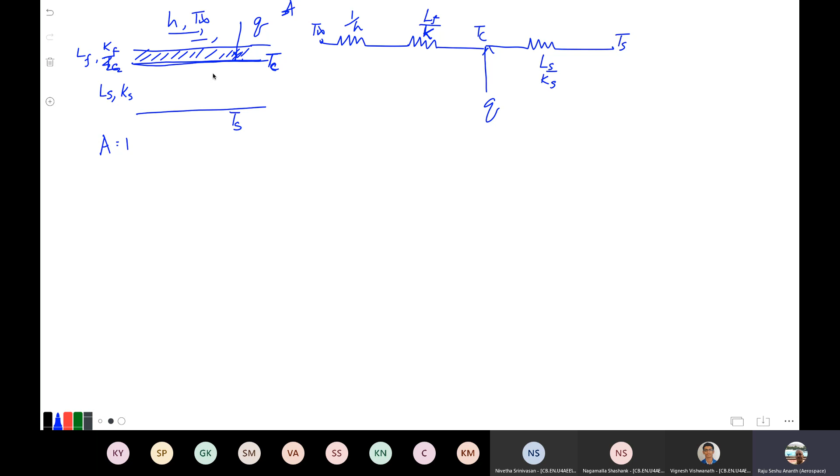However, this is only when this substrate is transparent. Suppose it's not, it's an opaque material, so I'm heating it here. TC is there, but I'm not heating here. So this is TF. I don't know the TF.

So there is a Q coming in. The Q1 escaping to the air and Q2 escaping to the outside. I don't know TF, so how will I solve? That's the difference between this problem and the earlier one.

The only thing is, I know Q2 is going here as well as going here. So this is TC, this is not changed, so I can get Q2 from knowing TC. What is Q2? TC minus TS divided by LS over KS, which is same as this. So Q2 also is same as TF minus TC divided by LF over KF.

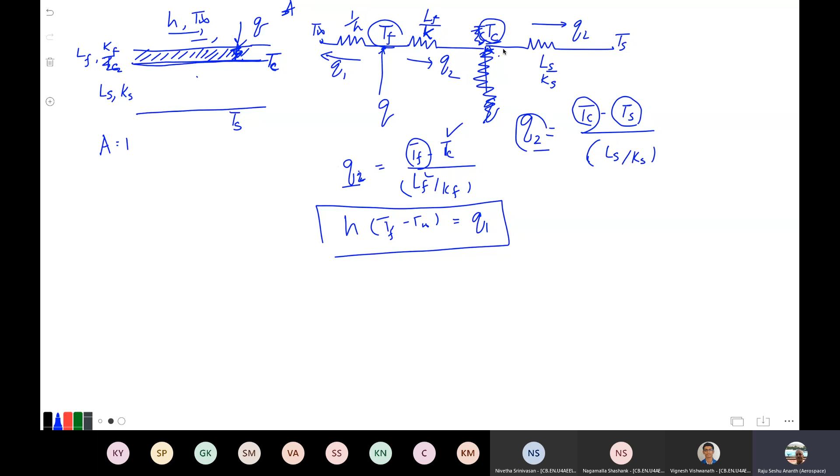So just a small variation becomes a little complicated because you don't know this. The advantage of doing this electrical resistance analogy is that many times you don't have to know the middle temperature, you can get the total resistance. But unfortunately, I don't know this, so I cannot do that way. You've got to do it in a separate way. Many people couldn't get this one at all.

Anyway, I'm just explaining. Are there any questions on this? There's just a small variation that makes some difference here. You've got to use the fundamental principles to solve it. But the electrical circuit does help you, it tells you exactly how Q2 is going, there's no heat here, so Q2 is going here. Understood this problem? Any questions? Please feel free to ask if you didn't understand any concept here. Okay, all right.

Now, the other question I was asking about is a hollow sphere. I asked two different problems. So inside radius is Ri and outside radius is R0, with T0 and Ti here. The first problem was, what is the temperature distribution in this space?

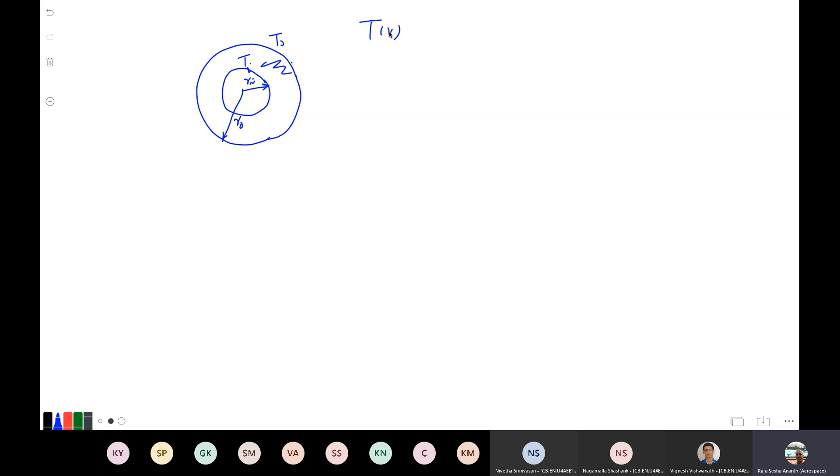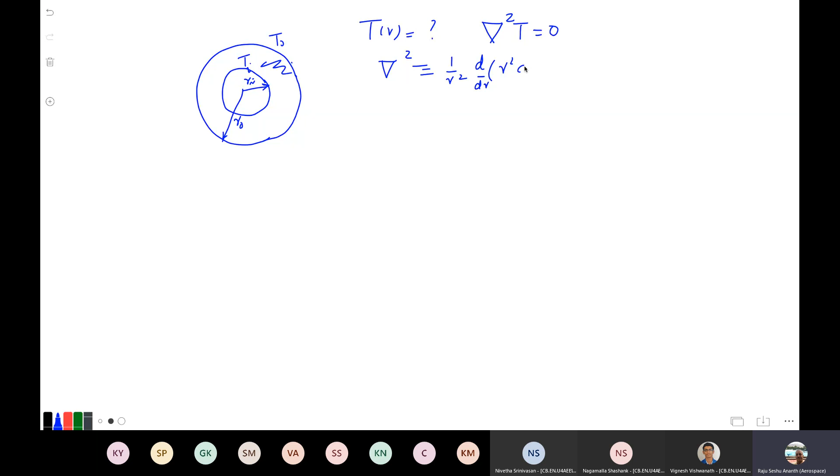If the temperature distribution question is asked, immediately I know the conduction in steady state is del square T equals 0. In spherical coordinate system, the del square operator is 1 over R square, d/dr of R square dT/dr. So I need to solve this equal to 0. Then R square dT/dr is a constant.

Then you can differentiate both sides, which goes to 0. So dT/dr is C over R square. Integrating again, T of R is minus C over R plus D, some other constant. So knowing the ID and OD, I can calculate C and D. But that doesn't, if I ask you, this is how to solve the temperature distribution.

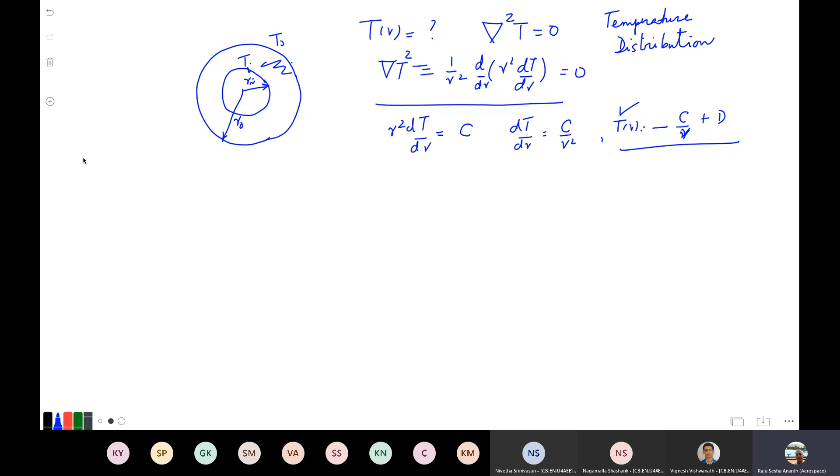However, suppose I want you to know what is the thermal resistance of the hollow sphere. How will I do that? Now, it's advantageous if I give a thermal resistance, either it could be a sphere or a hollow cylinder, it doesn't matter. Let's say I have a hollow sphere and I have a hole here. So this is Ri, the radius, and I take an arbitrary radius R and I formulate the heat.

Remember, in steady state heat transfer, the integrated heat escaping this whole sphere at any radius is the same. That's key, that is the important thing. So minus K, look at Newton's law: minus K, area 4 pi r squared, dt/dr, is Q. Remember, when I talk thermal resistance, I need Q divided by delta T, or delta T divided by Q, whichever way, to get the resistance.

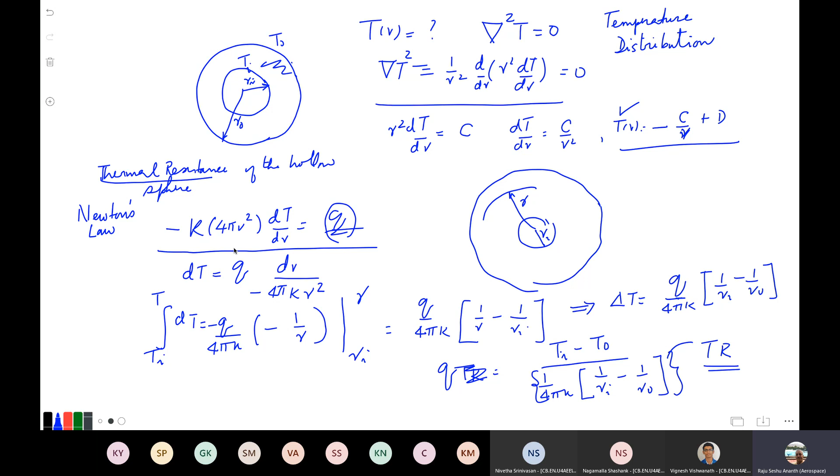Okay, so whenever thermal resistance is asked, it's advantageous to use this equation because it gives you directly T and Q. That's the reason. Okay, how will I do that for a cylinder? Let's just do that also. Okay, so I have a cylinder.

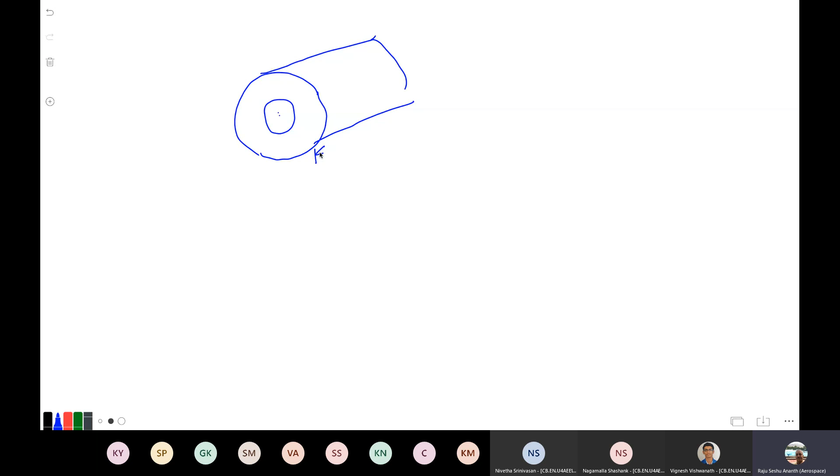If it is a full cylinder, what happens to the temperature distribution? Anybody knows? It has to be constant because the logarithmic thing goes to infinity here. So that constant is, so it has to be in a sphere as well as in a cylinder. If it is not hollow, it has to be constant, uniform temperature, the whole thing. So let's assume this is a length L. Remember, I'm trying to get the thermal resistance on a cylinder.

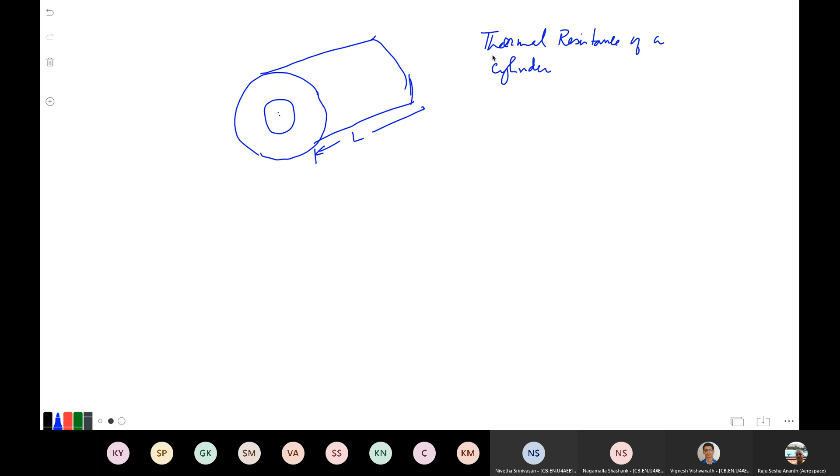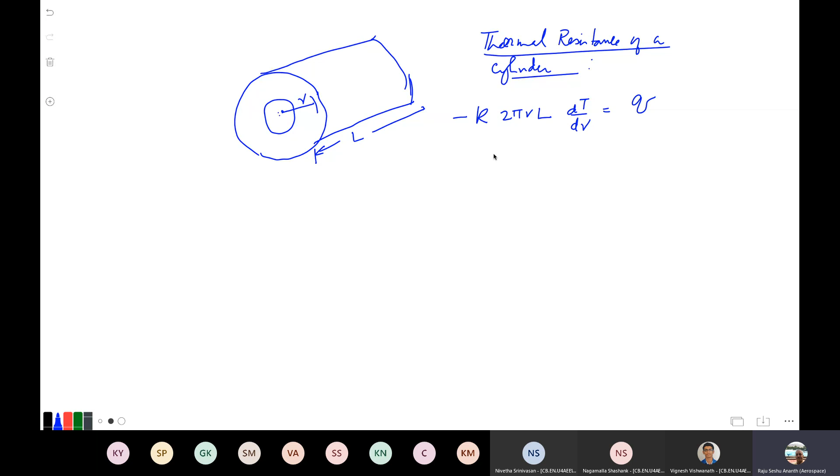Okay, so same way, I'm going to assume a particular radius R. So what is minus K, 2 pi R L, that's the surface area, multiplied by dt over dr, is my Q. Okay, so Q is a constant. So what happened? dt is Q divided by 2 pi K L, dr over R. So I integrate from some known temperature i to temperature T.

So this is Ri to R. So Q over 2 pi K L, log R over Ri. Remember, Ri is small, so this becomes big. So this is... that's correct. Okay, so here T minus Ti, so R naught is higher, so let's assume R naught. So this is R naught is, let's see, this is not correct.

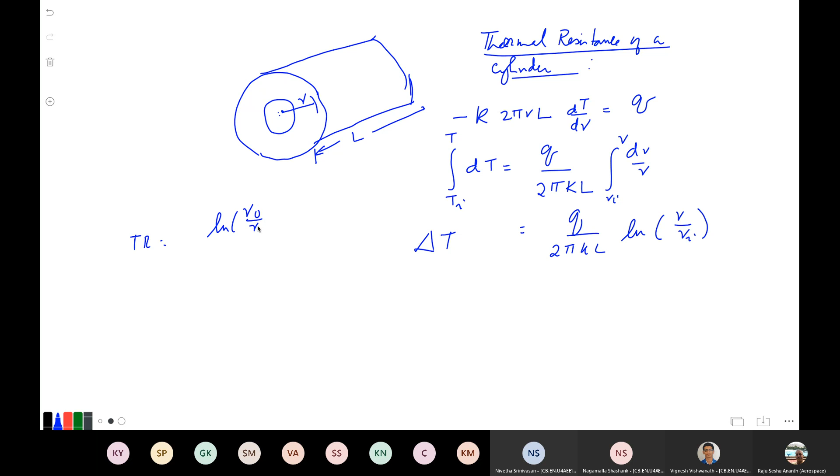Okay, that's fine. So this is T minus Ti is delta T. So the thermal resistance is log R naught over Ri, divided by 2 pi K L.

Because you need delta T divided by the resistance. So this is like 1 over 2 pi K L, divided by... this is the resistance, and the log of R naught over Ri comes in. So that is how we got the thermal resistance of a cylinder in a steady state problem. They're all steady state problems.

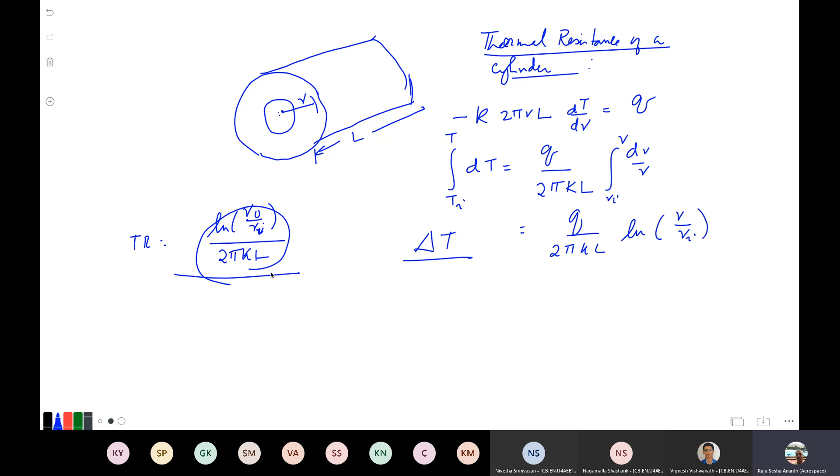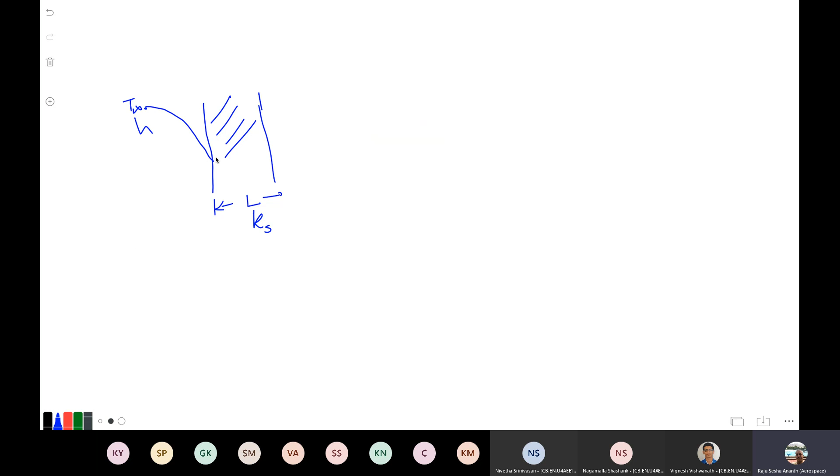Let's say I have this situation: a slab here of thickness L, conductivity K, and there's a fluid going here, T infinity, with heat transfer. So it's something like this, and then there's heat transfer on this slab, and then again another heat transfer. Let's say this is 1 and 2, and this is T infinity 1 and T infinity 2.

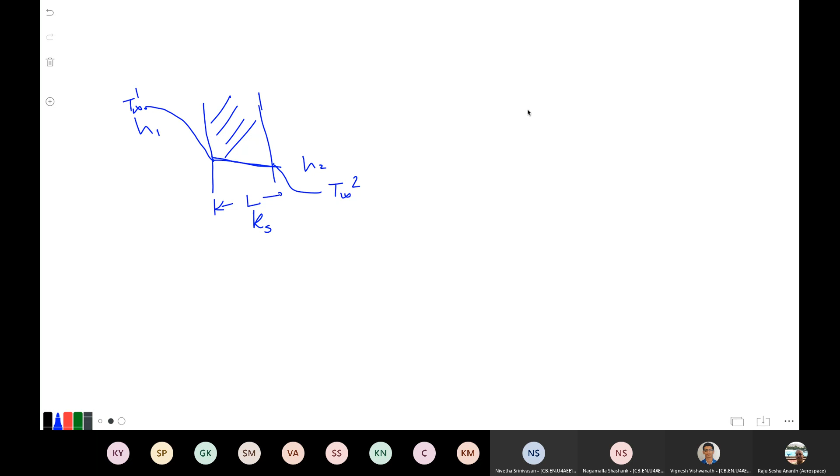This is K. So how will I write the circuit here? How will I write the circuit? I want to know Q, between T infinity 1 minus T infinity 2, divided by the resistance per unit area. So how will I do that?

It's nothing but 1 over H1, plus L over Ks, plus 1 over H2, per unit area, of course. That's it. So it's very simply done.

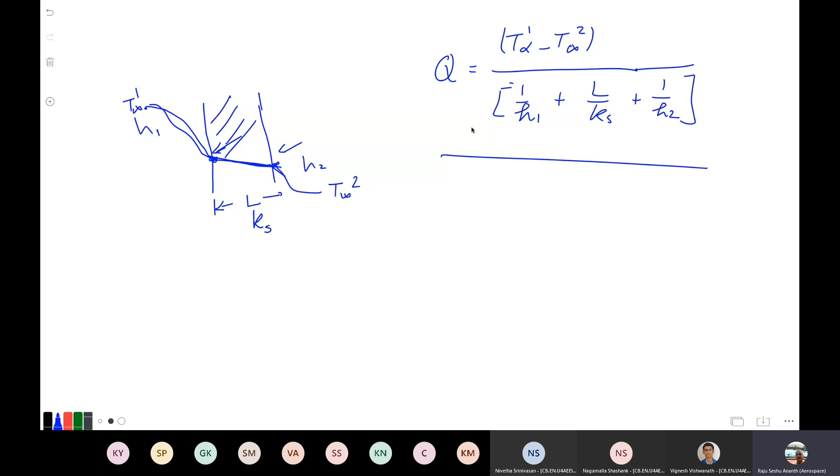I don't have to know the temperature here or here. You can find out the temperature once I know what Q is. The same heat is going through here, here, everything. So if I ask you what's the temperature at the entrance and exit of the block, I should be able to tell. But this is how you write it: you write the total resistance.

This is the same problem I gave you previously, but the same heat is not going through in your fin problem - the heat is escaping from here. If I heat it here, one heat goes this way, another heat goes this way - they're not the same. In this particular problem, the same heat is going through, transmitting into the solid, and then going to the fluid again.

They are in series - that's the reason you're able to sum the resistance. Understand? Any questions on this?

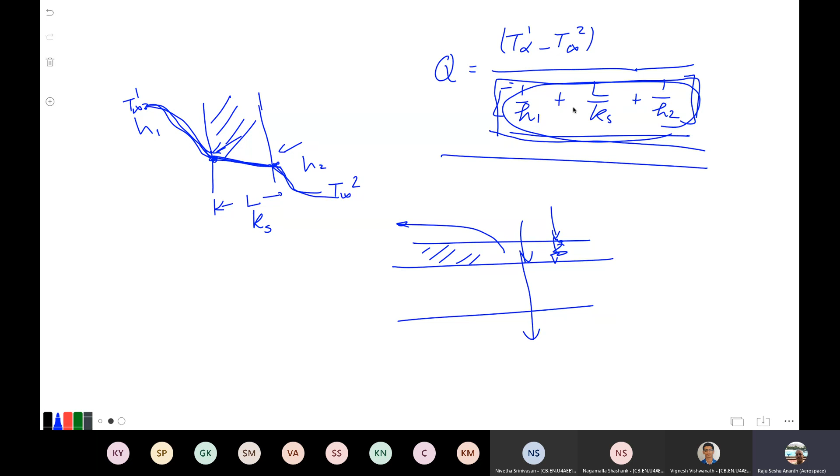You should be able to do some of this fundamental problem. Unless you do problems from the book or wherever the source is - one gentleman was telling me he referred to some YouTube to do problems. It's a good resource, I don't have any discouragement at all, but it'll be time consuming, obviously, unless you know exactly where to go.

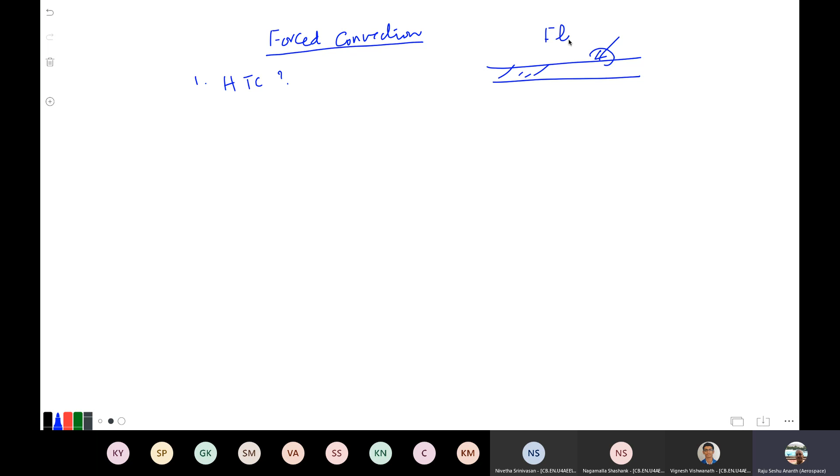What is the objective for a heat transfer expert? He wants to find out the heat transfer coefficient, HTC. That is his whole objective. Knowing the fluid mechanics, the fluid behavior, how will I find out the heat transfer coefficient? Heat transfer coefficient is an interface between a solid, warm or cold, it doesn't matter. So how is heat transfer occurring at this boundary between the fluid and the solid? That's where the heat transfer coefficient definition comes in.

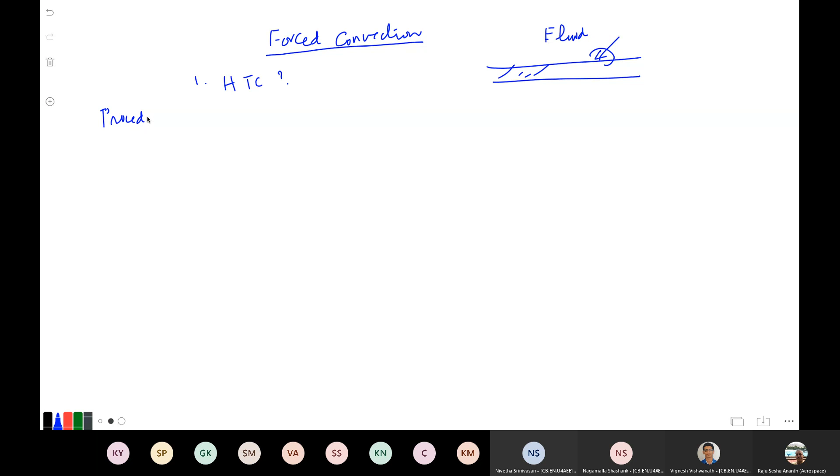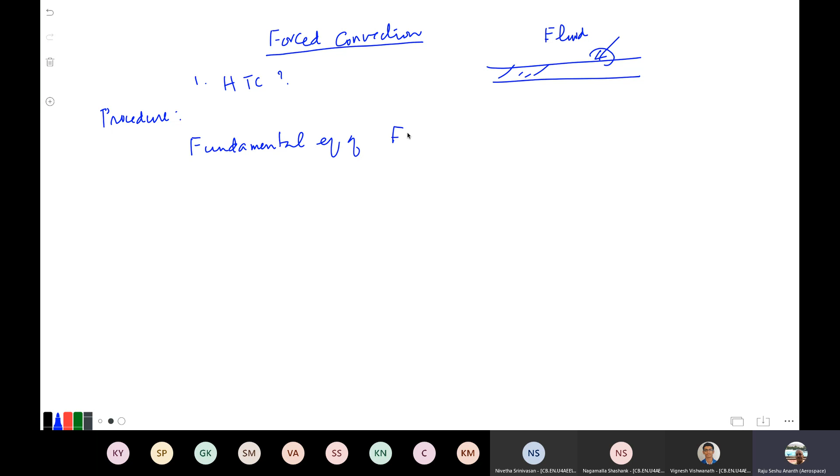So the first step is we need to solve the fundamental equation of fluid mechanics and do appropriate approximations. What are the approximations that I'm making here?

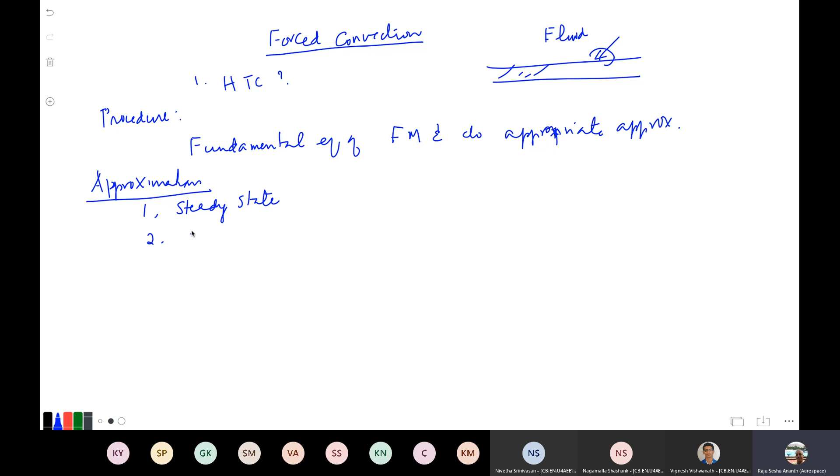One, steady state. Two, two-dimensional. Three, laminar, it's not turbulent at all. Four, fully developed, meaning the entrance effects have all disappeared. There's not going to be any changes to the mean velocity at all, it's going to be stable. Okay, these are all the approximations.

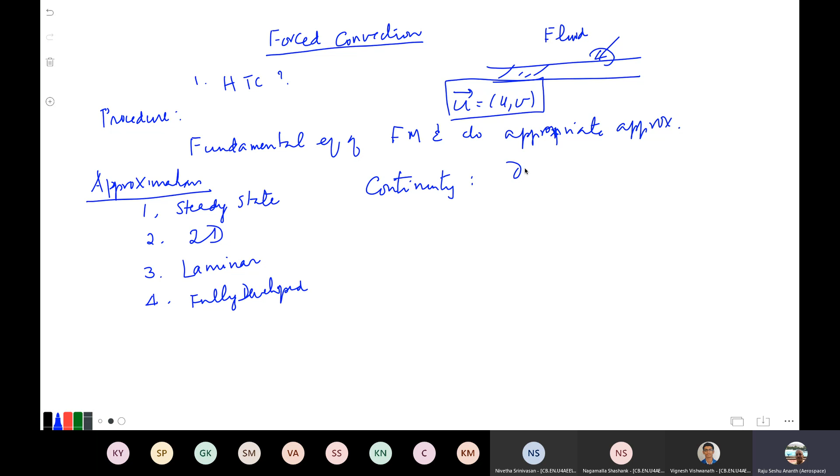So what are the equations that we saw yesterday? First one is the continuity. The velocity vector is u and v, w is 0 because it's two-dimensional. So u, if I put an arrow on top, means this is a vector. So du dx plus dv dy is 0. That's the continuity equation.

How about the momentum equation? I'm going to write momentum in general and then approximate it. Because it's steady state, the only thing we got is u dot del u is minus 1 over rho del p plus nu del square u. That's only one because w is 0 identically as an approximation, and d over dy I'm going to assume is much more than d over dx because the boundary layer is where a lot of action is, so I need to find more. So d over dy is much sharper than d over dx, that's the approximation I make. So what do I get for the momentum equation?

It's u du dx, well it's not zero, v is not 0. For a pipe flow it's 0, but here v is not 0. V doesn't change in the x direction, that's all. So v du dy is minus 1 over rho dp dx plus nu del square u over dy square. The x square term is eliminated here because of this approximation. So this is my momentum equation.

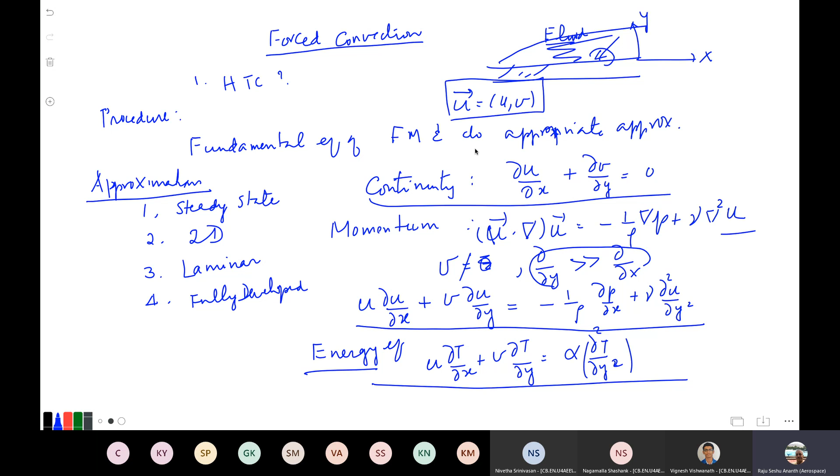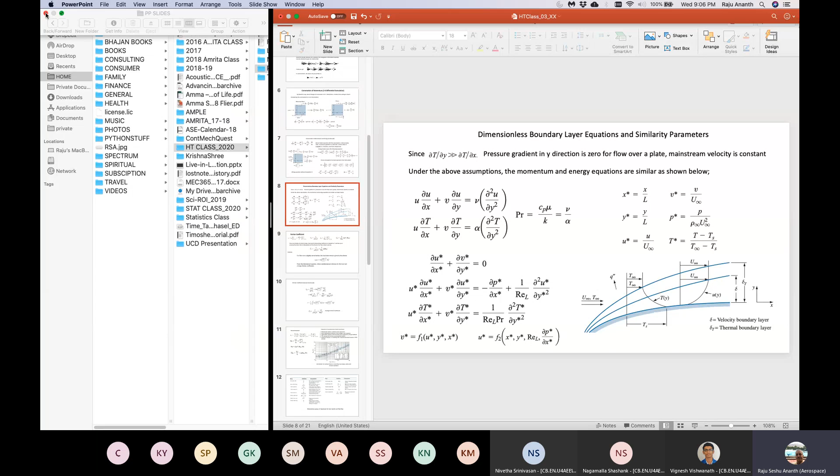Okay, if that is the case, let's just go back and look at where we are in the presentation. The first problem, so this is where we stopped yesterday. I'm going to explain it here. What I did here is a very simple non-dimensionalization of what happened there. Funny, I tell you, I don't understand sometimes Mac myself.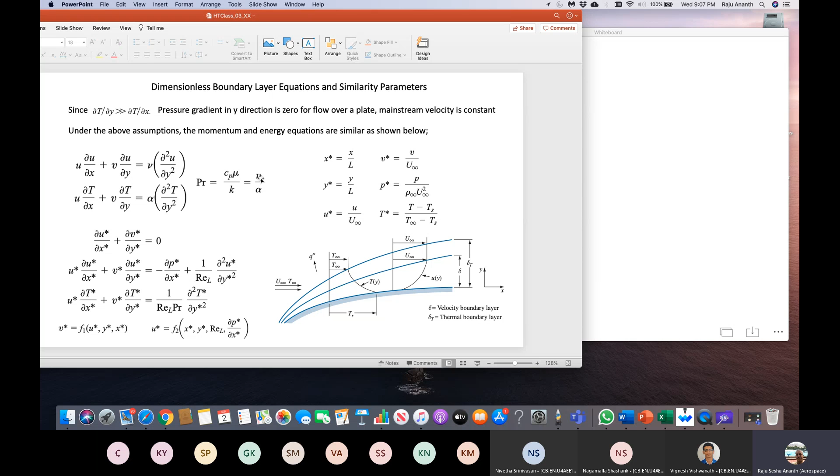What am I doing here? I'm just dividing, non-dimensionalizing all parameters. The distance parameter is non-dimensionalized by dividing by the length of the plate, some characteristic dimension. I'm doing everything the same for velocity, pressure, everything. I'm performing a non-dimensionalization. If I do that and apply the three equations, I find all the quantities are non-dimensional except there are parameters appearing on the right hand side. In the momentum equation, it becomes 1 over the Reynolds number based on the length of the plate. And the energy equation is not only dependent upon the Reynolds number based on the length but also the Prandtl number. The Prandtl number is the ratio of the kinematic viscosity, which is the diffusion of velocity, divided by the thermal diffusivity, which is related to the diffusion of thermal energy.

That's all, so okay, what happens? Quickly, I can tell my solution, so based on this, let's look at this.

So U is a function of... here I find V, I can bring it to the right hand side, and it will be a function of U, X, and Y, isn't it? It's simple because everything is non-dimensional, no other terms involved, only V, U, and X. So V can be determined from this equation, some arbitrary function of U, X, and Y. Those are the only parameters I see.

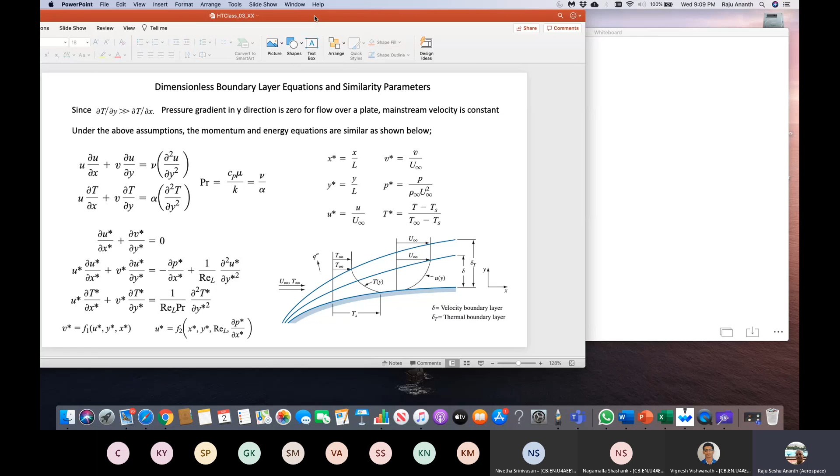Now looking at the second equation, I need to know u prime. So v prime, I know that is x, y, and then u prime. So this is going to be a function of x and y, non-dimensional, plus there's a Reynolds number coming in, plus the pressure gradient, which is important. I equated u from this equation because v is known from here, and substitute v in. So u will be some arbitrary function of x, y, and Reynolds number. I don't know what the functional relationship is, but I can tell from the behavior of the equation that it has to be some arbitrary function.

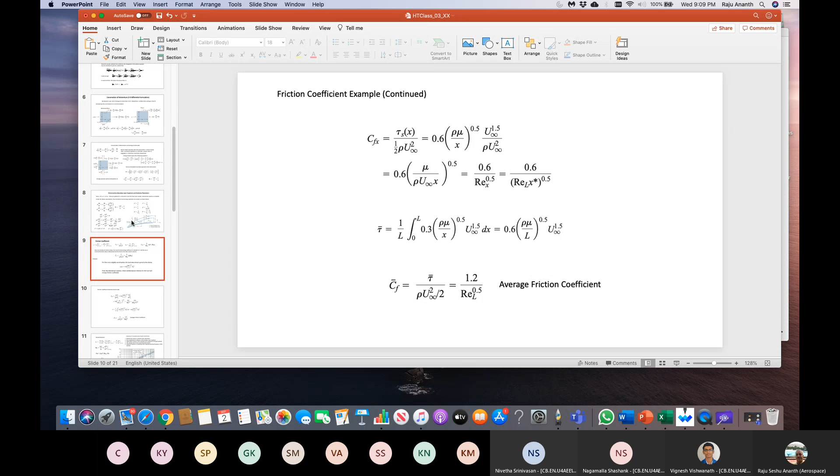And similarly, why did I do this? So I stopped here. I did not proceed further.

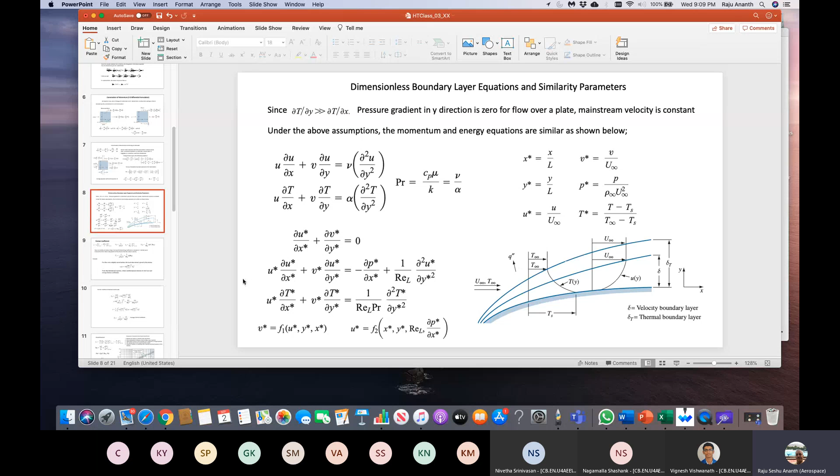Now we know that u and v are given here. How about the stress friction coefficient? Friction coefficient is going to be mu du/dy on a plate.

So I convert that non-dimensionally: mu, u naught, u over u naught, multiplied over L, y over L multiplied by L. That's how I get this. So du/dy non-dimensional, at y equal to 0. That is where my stress is.

So what happens? I can define this as non-dimensional. Let's see what's happening here. If I multiply this, this is a stress. If I multiply by L squared, I can convert this into Reynolds number. A coefficient of either the drag or the friction is by definition given by the shear stress divided by the dynamic head, which is rho u squared over 2, the dynamic pressure head.

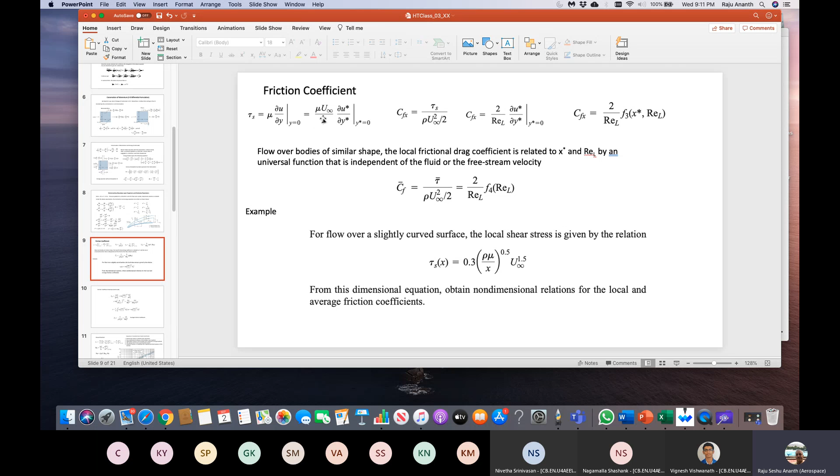That's the definition. So again, I apply the non-dimensional parameters here. I find this to be equal to... tau, as you know. Let's do that, because if I do it quickly you guys won't follow it at all.

So my tau, the shear stress, is given by mu u infinity over L, du/dy, these are all non-dimensional. This is non-dimensional also. But the coefficient of friction or drag based on the x distance is given by the shear stress divided by rho u squared over 2. So let me put that: mu u infinity over L, du/dy at y equal to 0, all non-dimensional, divided by rho u squared over 2.

So u squared and u just cancel. Mu over rho is nu. So 2 du/dy non-dimensional, at y equal to 0, divided by, since mu over rho is nu, u infinity L. So this becomes a non-dimensional number: 1 over Reynolds number, or 2 over Reynolds number based on length L, multiplied by du/dy, again non-dimensional.

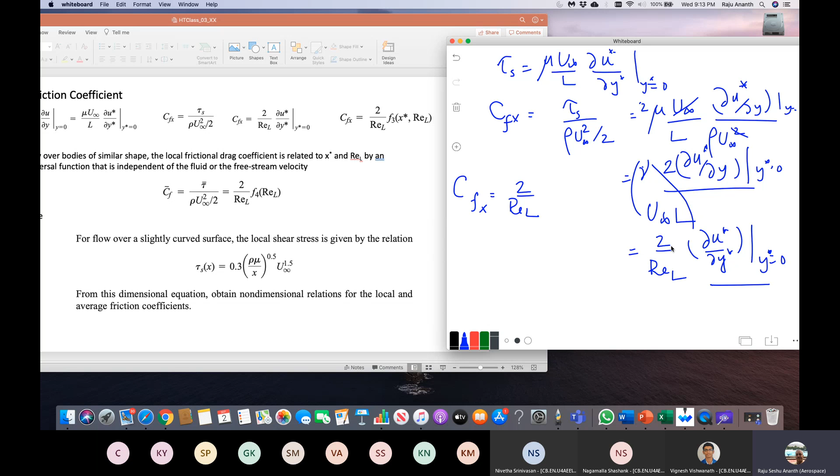So what does that mean? In a general case, since u is a function of these variables, I'll have Cfx equal to 2 over Reynolds number L times du/dy. And we know from the earlier page what du/dy is, so let's look at the earlier page.

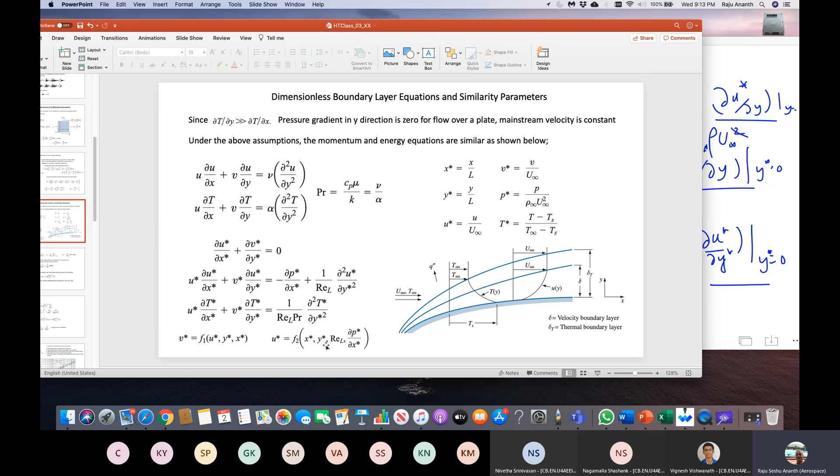So u is a function of x, y, Reynolds number, and dp/dx. Let's assume there's no pressure gradient for now, to make the problem easier. If that's the case, I find the coefficient of friction to be some arbitrary function of x prime, because remember I put y star equal to 0, so y has disappeared from the problem. So it'll be purely a function of x prime and Reynolds number.

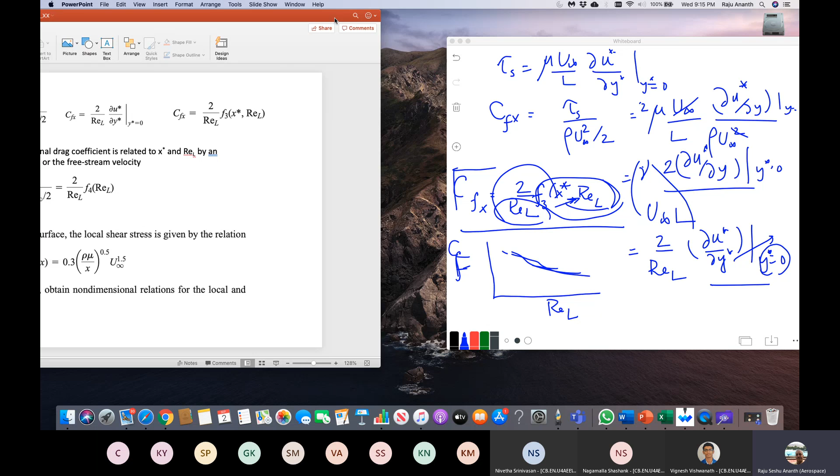So simple dimensional analysis has given me that the coefficient of friction has to be inverse of the Reynolds number, and some factor is a function of Reynolds number. So see what happens here. If I want to conduct a test for this friction, I want to get this plot. So I know for various x prime or whatever at some location, if I know the Reynolds number for the test, I can find out exactly where the CF is going to be, as a function of Reynolds number, how does it vary. So I know the performance of this function f and so on. So dimensional analysis, even though it looks rather simple, it has a lot of importance, giving you some interpretation of the real behavior of a phenomenon.

Having seen that the stress is related to the Reynolds number, I'm going to do a problem just to illustrate that relationship. Here the flow is going to be over a curved surface, still, let's assume laminar. The local shear stress is given by the relation, some 0.3. This is basically some sort of a, if I take 1 over Reynolds number square root, that's what it almost becomes, because you can bring this inside here and so on. So some sort of function of this.

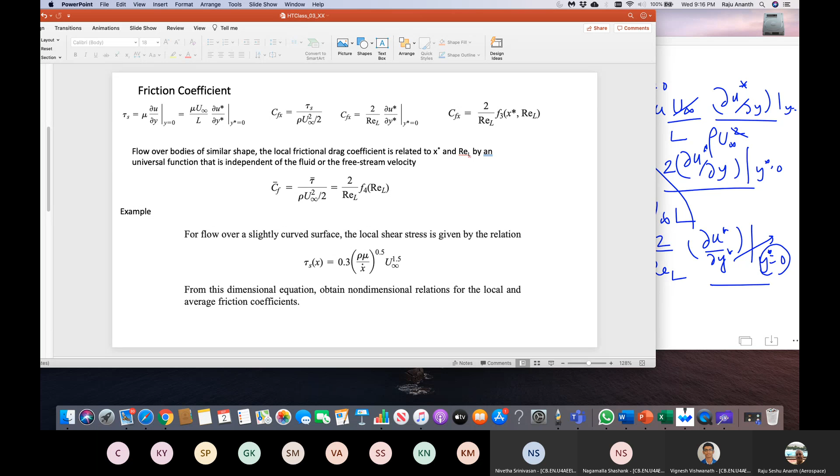Let's get ready to explain that. So you know CFX based on X is the shear stress at the wall based on X, divided by half rho U squared. He has already given the shear stress to be 0.3 multiplied by 2, so it'll be 0.6 rho U over X to the power of 0.5, U infinity to the power of 1.5, divided by rho U squared.

This should be U infinity. Rho mu, I'm sorry, not velocity divided by X. So I can manipulate all that, it's not difficult. I manipulate all this U infinity to the 1.5, everything like that. So I get 0.6 multiplied by mu over rho U infinity X. So this looks like 1 over Reynolds number, isn't it, based on X distance.

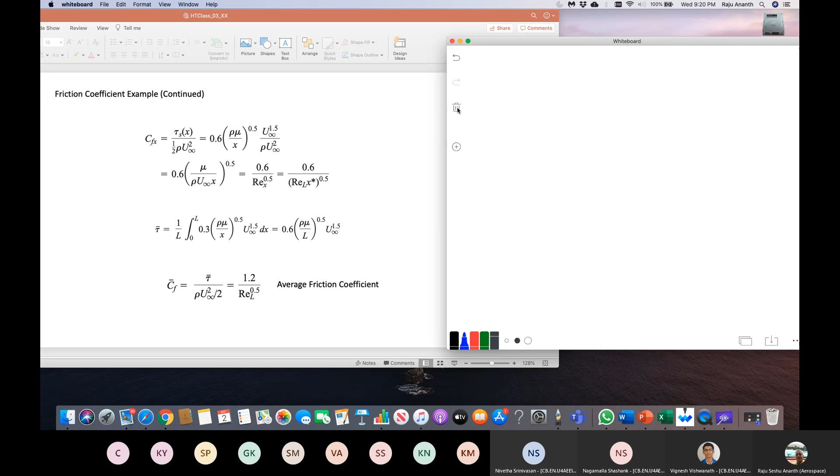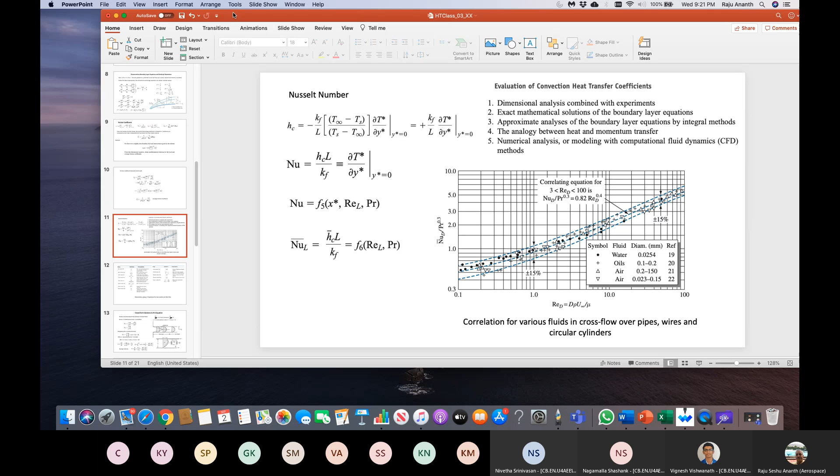Let's go one more step, just to illustrate the power of this. I started the momentum equation, didn't do very much to the energy equation. If I perform the energy equation, what do I do? Basically, my heat transfer coefficient, let me just do this one here. I'm going to do the similar one on the Nusselt number also. Let's just do it. So heat transfer coefficient.

So what is the, suppose I have a plate and I have a temperature, this is the temperature T infinity, and it's hot. So this is Ts. So what's the heat transfer from here to here is minus K dTs over dy. This is y, and y is equal to 0.

So that's dt over dy. Okay, so what I'm going to do here, I'm going to non-dimensionalize everything. This is the fluid, by the way. So it's kf over the length of the plate. I non-dimensionalize y as y prime. And then I need to non-dimensionalize the temperature also. I'm going to divide that by T infinity minus Ts, divided by Ts minus T infinity. And then dt over dy.

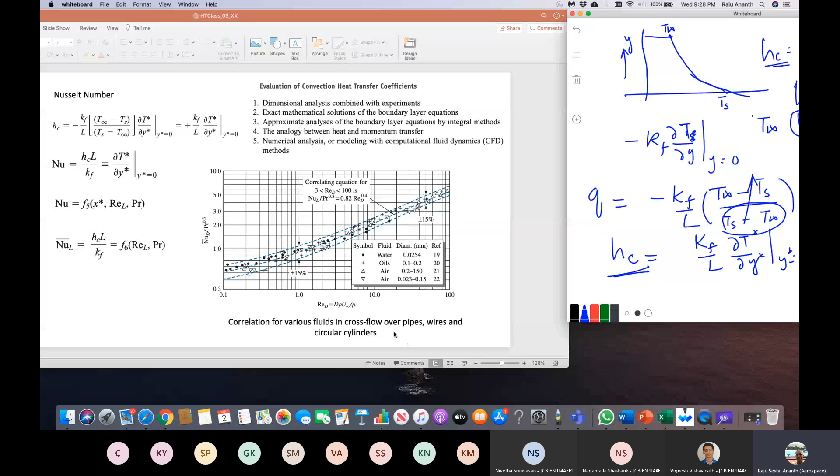So from 3 to 100, for various geometrical shapes, like cross flow over a pipe or a wire or a circular cylinder, at that Reynolds number, you can use this correlation. Understood?

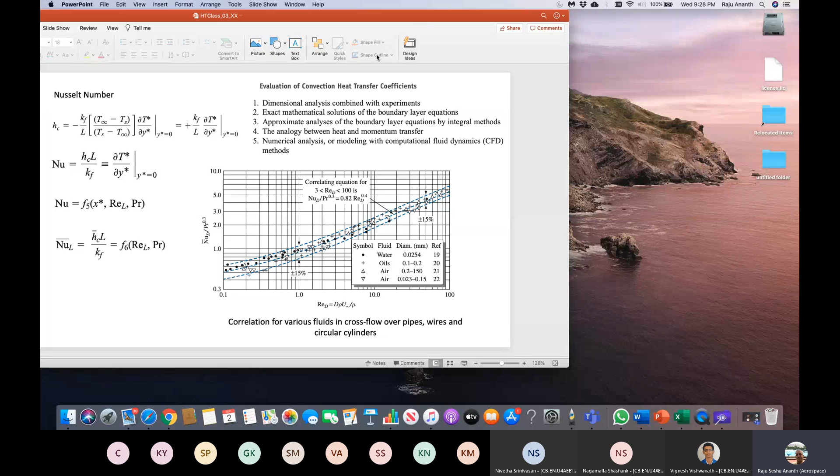Everybody, any questions on that? Any question? No question?